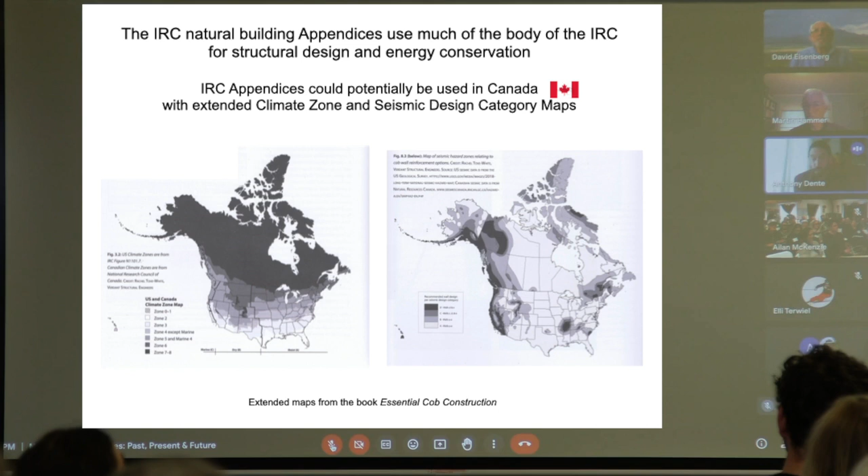We made the effort to take the code tables, charts, and images and span them between both countries, trying to make the book as applicable to both the US and Canada as possible. This book isn't just helpful for people designing cob or clay systems, you might find it useful for other factors, and that's why we believe this might be an interesting presentation for you. I'll let David take it from here.

Next slide. So, I've been dealing with building codes and natural building for, I don't know, 25 years or more maybe. And it was an interesting process. Martin, why don't you go to the next slide?

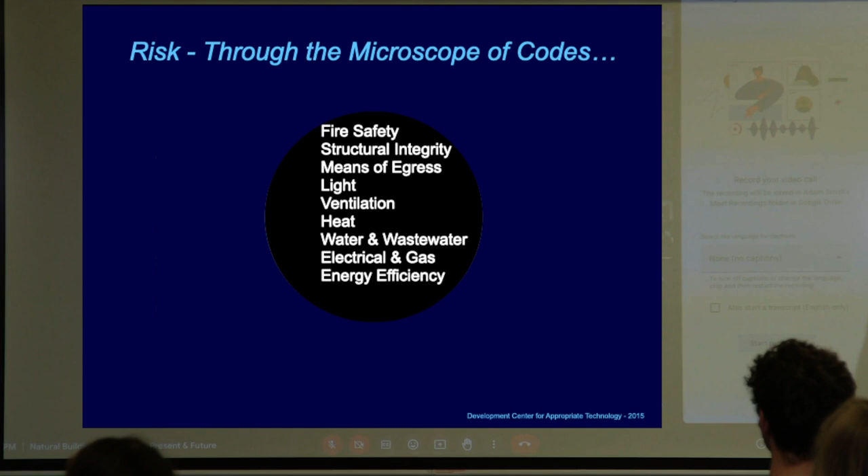A lot of it had to do with helping code officials see that they were actually focused on a set of hazards associated with the built environment that were not the full set of hazards associated with the built environment, and finding ways to talk about that with them that actually got through, expanding their frame of reference for thinking about what they were doing. It took a long time. I had this revelation, I created this set of slides about 20 years ago.

Next slide. So you see in the center there the hazards that the codes typically address, and I was pointing out that buildings are actually producing a whole other larger set of hazards that you can't see while you're looking through the microscope of building codes.

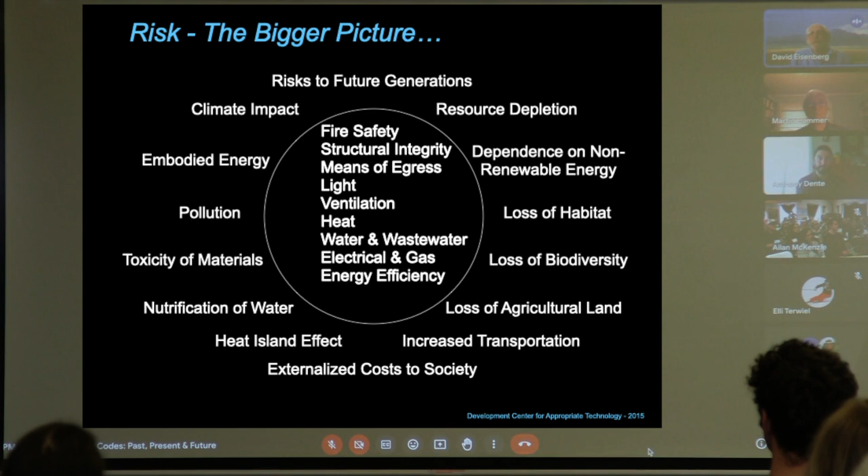Next slide. In fact, the reality is that to deal appropriately with hazards attributable to the built environment, you need to be able to see them all and work on balancing them. It's not either or, it's about recognizing how buildings are impacting all kinds of things, and how even building codes can make hazards away from the building huge, like climate change, for example.

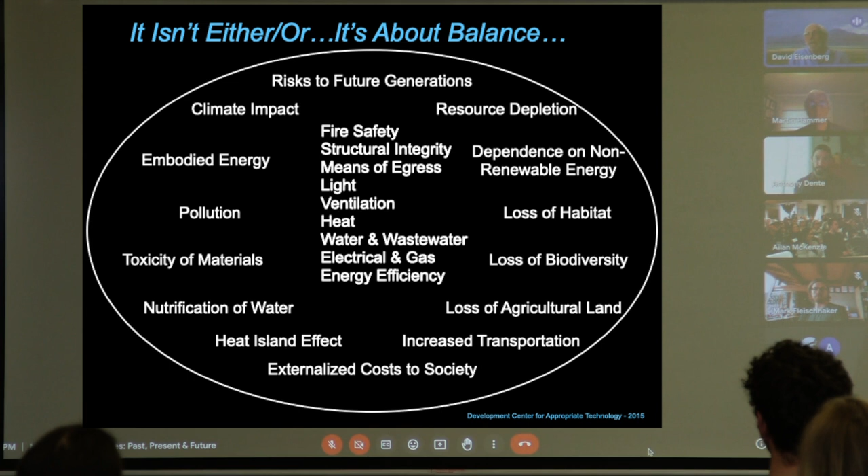Typically what's happening, whenever we would bring up issues around the environment or toxicity, basically what we would hear from code officials was it's not in their remit, it's outside of their purview. And I would point out the purpose statement of our building codes here in the US, which has a bunch of detail in it.

Do you want to jump in, Martin? Yeah, it seems David, you're back? You froze there for a moment. Am I there? You're back now. You froze as you were getting into it. Okay, I'll try not to freeze again.

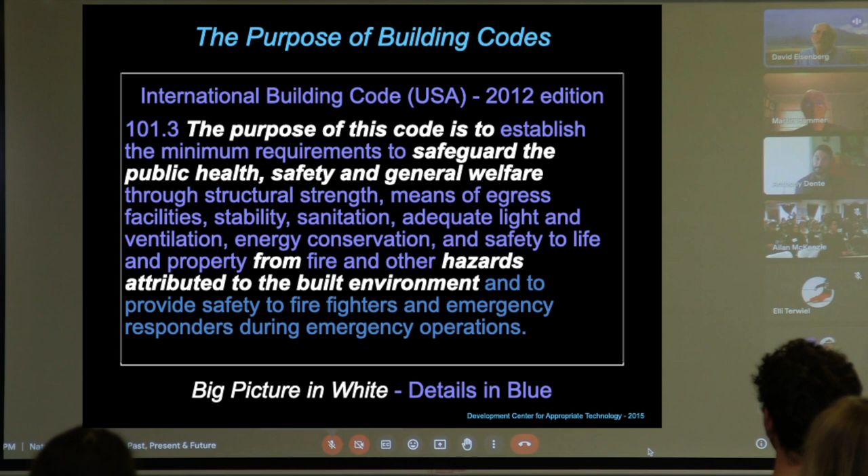So anyway, essentially the purpose is in white. And basically those things were actually part of their responsibility, even though they didn't think they were. One of the things that's happened is that they've changed the purpose statement, and one of the things they eliminated was other hazards attributed to the built environment, which was kind of a shock when Martin and I went back and were looking at this and noticed that.

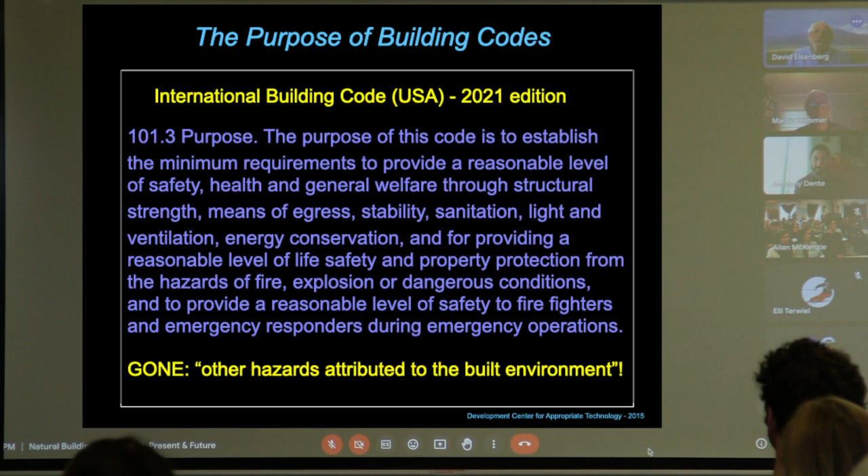But what's happened in the last few years is suddenly the International Code Council in the US, the organization that creates the US codes, they started actually recognizing a bunch of things like climate change, embodied carbon, water issues, and all kinds of things suddenly started showing up in their newsletters and in committees they were creating, and that's been really good.

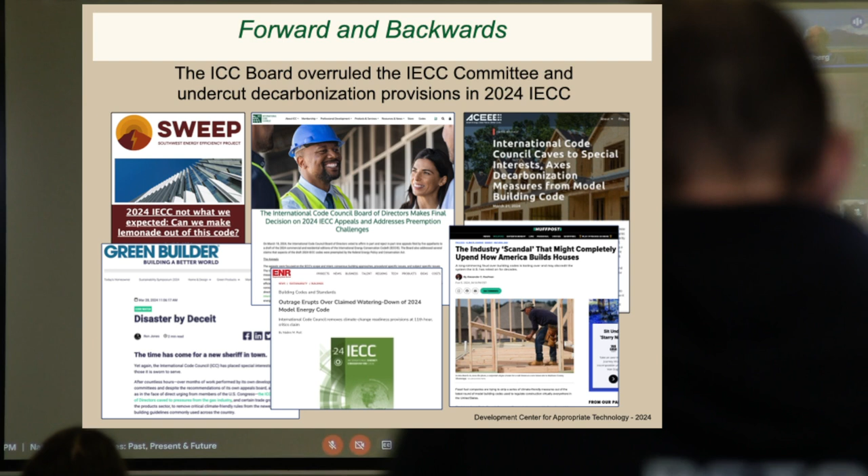And then just in the last few weeks, the ICC board basically overruled the Energy Code Committee, undermining a bunch of decarbonization provisions that have shown up. So it's a back and forth process, but things are moving forward in a way that only took about 30 years to get moving.

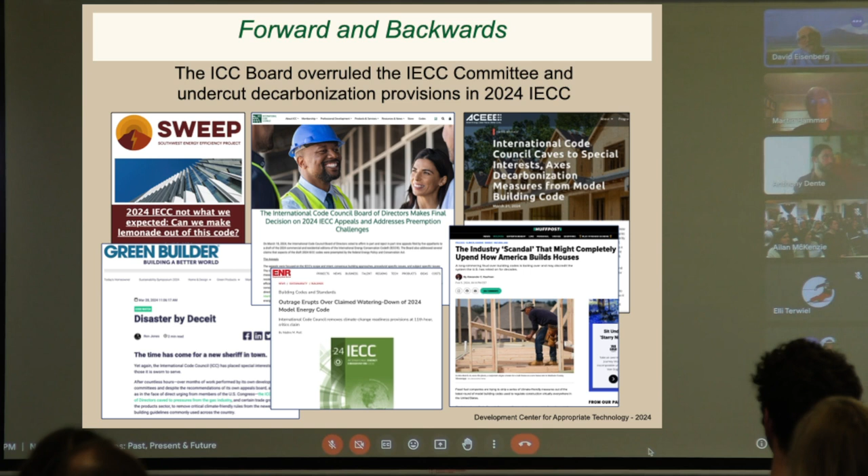Martin, I think it's... Yeah, so I'll go from here. Just a bit about the natural building codes that currently exist in the US, and we'll talk a bit later about how these might translate into Canada and elsewhere.

As David mentioned a moment ago, the International Code Council, ICC, is the nonprofit body that oversees code development for model building codes and other codes in the US. The glaring issue here is in the name of the organization, the International Code Council. Many of the model codes created under ICC's oversight are used internationally, particularly in parts of South America and the Middle East, but many countries, including Canada, don't use the ICC codes.

So some of it's aspirational, built into their name, but they are the model codes that ICC helped create. They're literally available to anyone who chooses, to any jurisdiction, national, state, provincial, county, city, that chooses to use them.

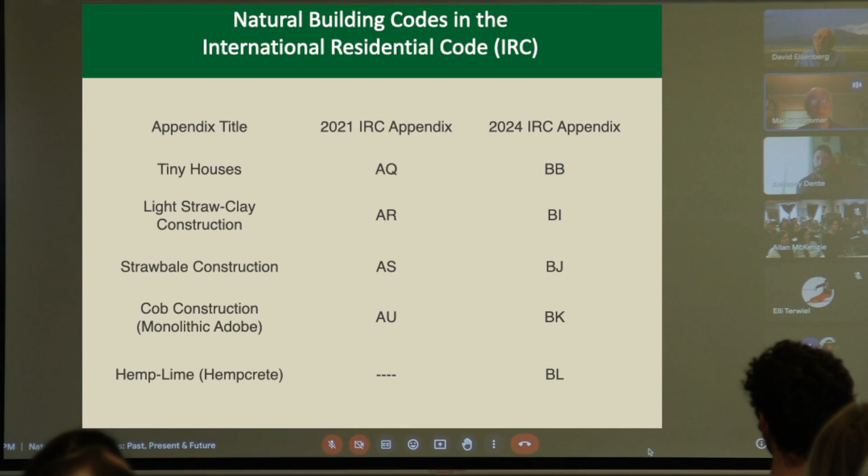This is just a quick summary of the so-called natural building codes that are in the International Residential Code, which is limited to one and two family dwellings and townhouses, so uses or occupancies outside of that are not covered, those are covered in the International Building Code. It started with the straw clay and straw bale appendices, and then followed, somewhat by accident, by tiny houses, which is not directly a natural building code certainly, but related. Then cob construction, and then most recently hemp lime.

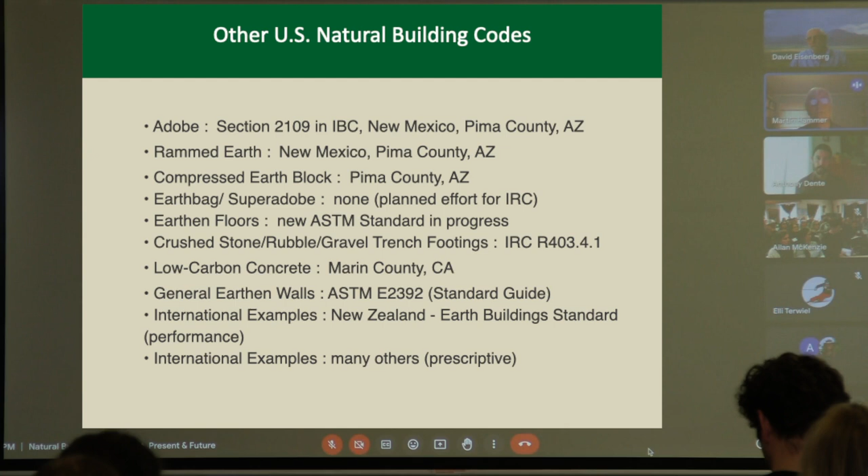And then these are other natural building codes in the U.S. that exist or are being planned. Just have a quick read of those. Also a mention of an important international example, the New Zealand earth building standards. There are others, especially for straw bale, like in France for example, but mainly this is a list of U.S. codes.

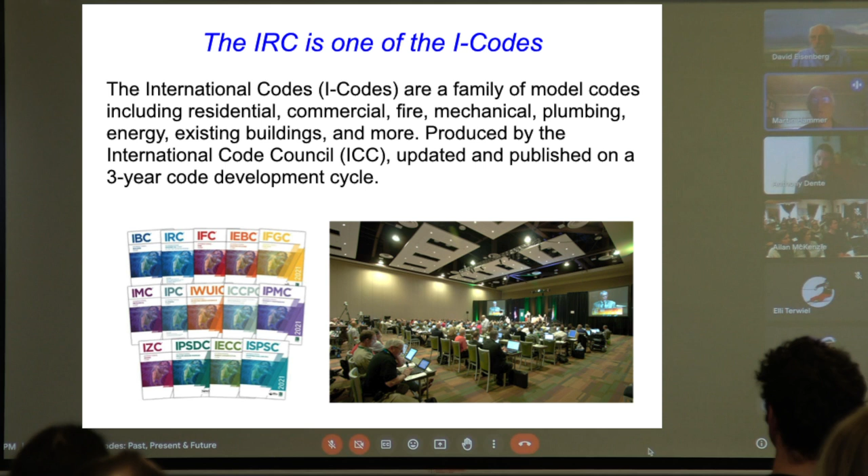Yeah, and as I mentioned, the IRC is one of the I-codes, this family of I-codes including plumbing and mechanical, and just to emphasize that these are model codes, they have no enforceable standing of their own. They must be adopted by a jurisdiction in order to be enforceable, and they are the basis of the building codes for virtually every U.S. jurisdiction, and as I mentioned, they are available for adoption and use worldwide.

So a little bit specifically what's in the codes. We'll highlight first the straw bale construction code.

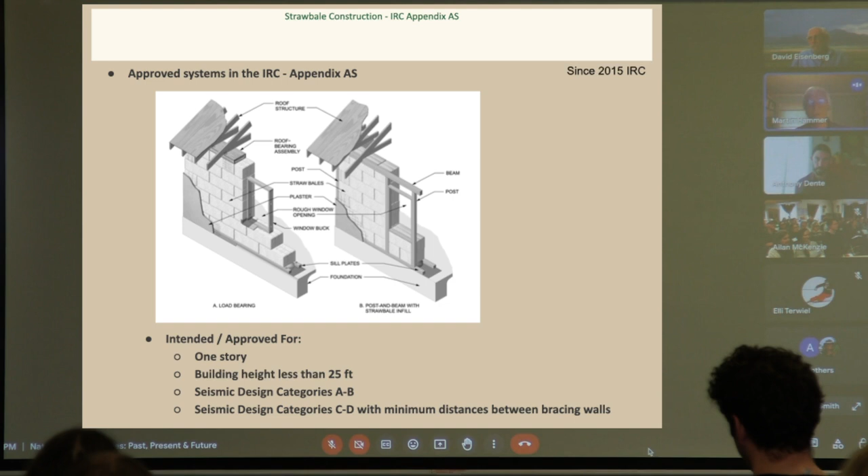All of these appendices place limits on the system. You can see at the bottom, it's approved for 1-story buildings, height less than 25 feet, and in the lower side of the design categories. Although that's with the prescriptive use of this code, they are allowed for uses that exceed 1 story or exceed 25 feet in height with an engineered design.

This is just the kind of outline of the straw bale appendix, but we use a similar outline for the other appendices like cob and straw, clay, and hemp. It was just a good way to organize all of them.

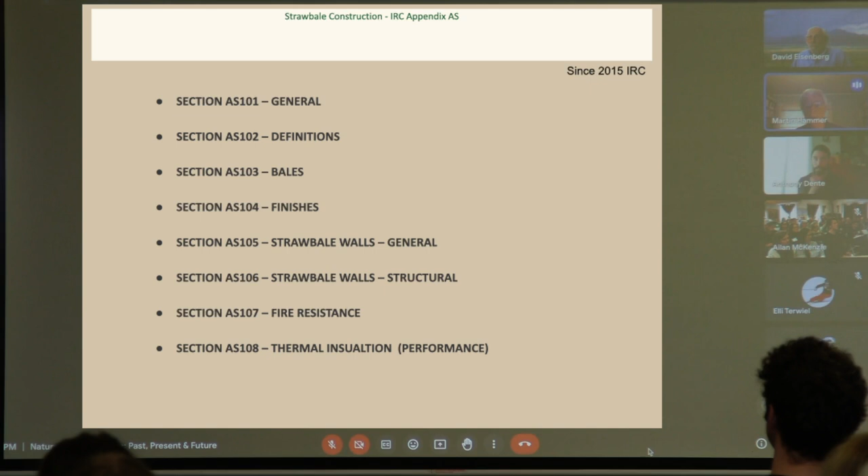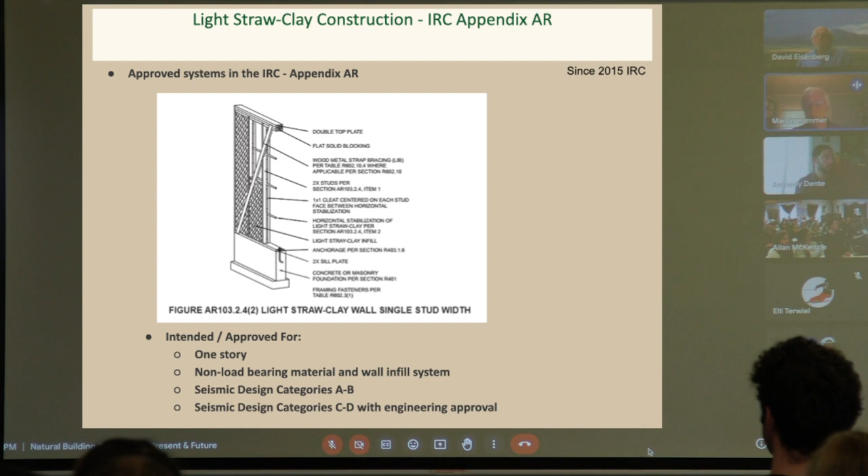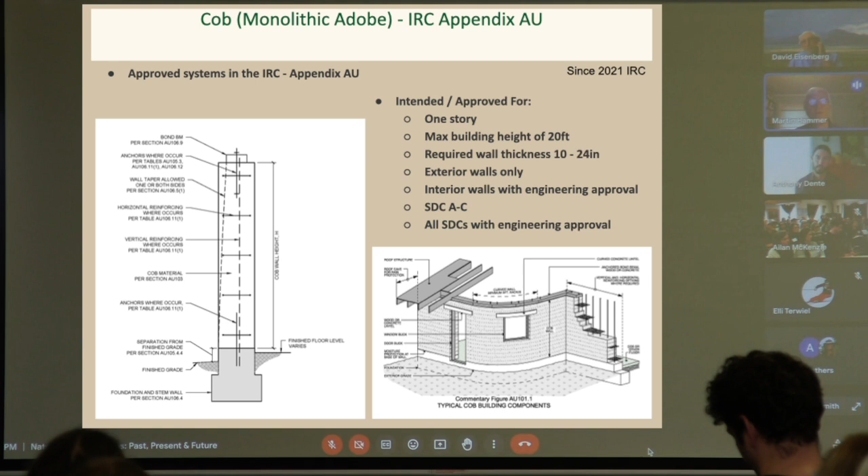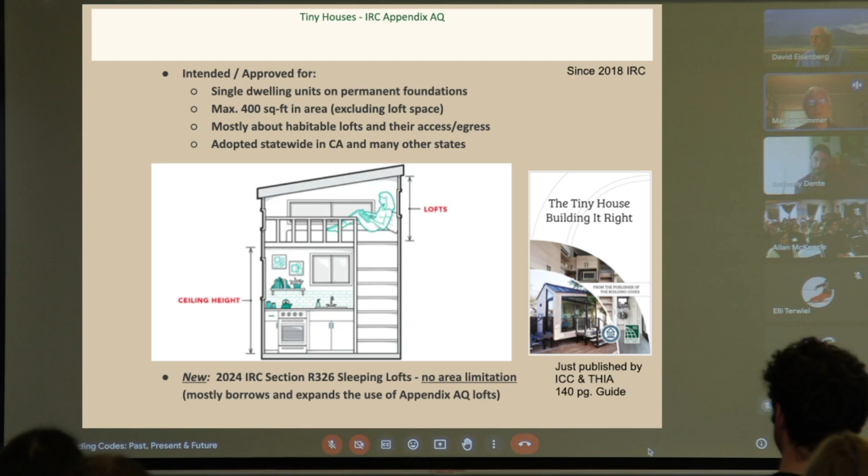And for the tiny house appendix, it was something we stumbled on. It started with me simply testifying in support of a proposal relating to this. It's remarkable how in this arena, one thing leads to another. This is a prime example, and also how relationships are built between people who work in this realm, and it takes a long time to develop those relationships and get all of these things across the finish line.

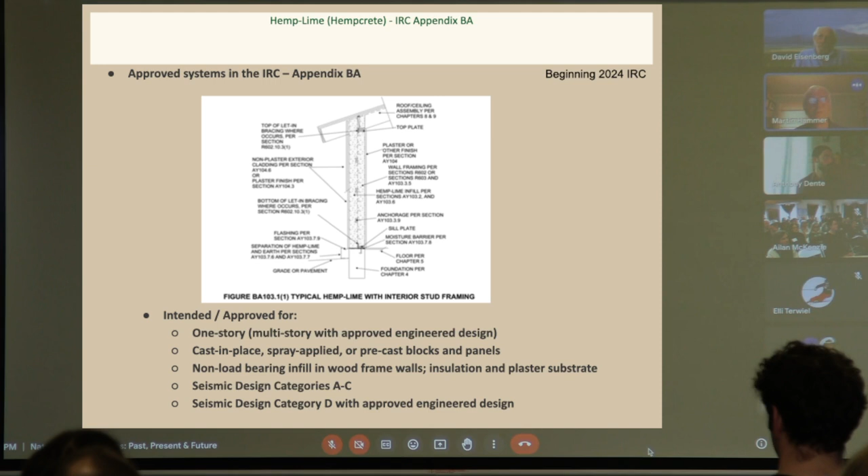Most recently, this is the hemp lime appendix in Canada. I know you guys are ahead of us in the U.S., because it was only in 2018 when hemp was approved or made legal as an agricultural crop in the U.S. And of course, France preceded Canada. That's where the hemp lime, or hempcrete, system originated.

Anthony? Yeah, thank you, Martin. And if it's not clear to anyone, or if it's helpful for the question and answer period that we plan to have at the end, Martin was the lead author on most of, or co-author on all the IRC codes in that table earlier, with David right by his side. And I've been the lead engineer on a number of these, and we've all been involved in almost all the codes mentioned that are US-based on both of those sides too.

So if you have questions about any of them - one important one is the Adobe chapter in the IBC. And if you're building with Adobe, it's got some tricky avenues. It's been around since in its current form since the 80s, and then far before that. It's slated to be removed, but for anyone familiar with our reference codes in the US, masonry is governed by the Masonry Society Code, TMS, they abbreviate that, 402. And we now have a committee in TMS 402 for contemporary Adobe Masonry section.

And I just volunteered to be the chair of the structural portion of that. And so that's underway. This code, as it currently stands, is not removed yet, but only applies structurally to seismic design category A and is quite limited. So it can be as unhelpful as it is helpful. And I can talk more about that if people have questions.

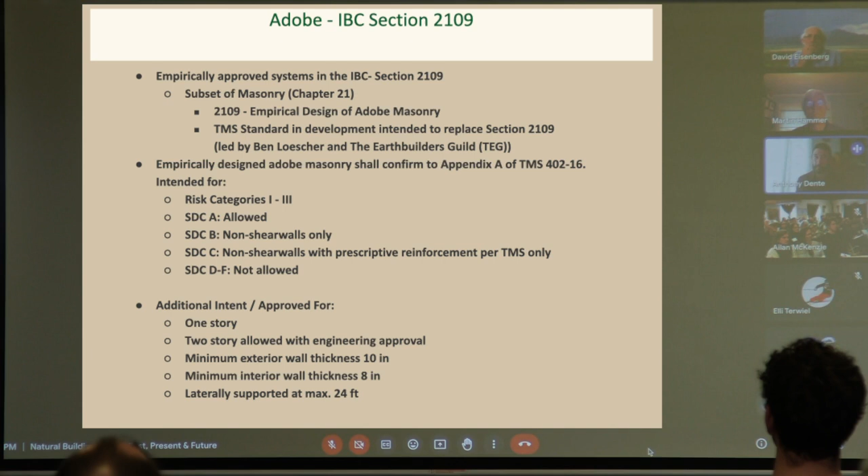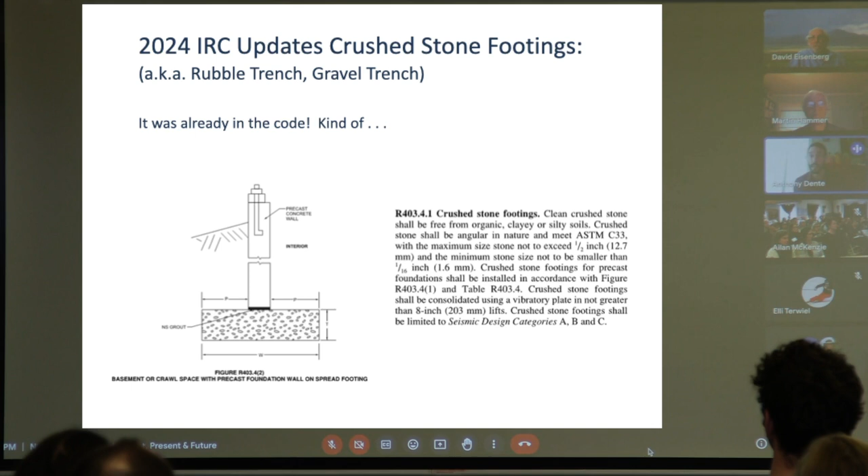And so we just simply took the language they were using for those and allowed it to be used for cast-in-place concrete footings. So you can get a good concrete cap at the base of your building. It receives your anchors, but if you've got to go deep into the soil to reach competent bearing or frost line, you don't have to do that with the high embodied carbon concrete. And we're working on expanding this even further.

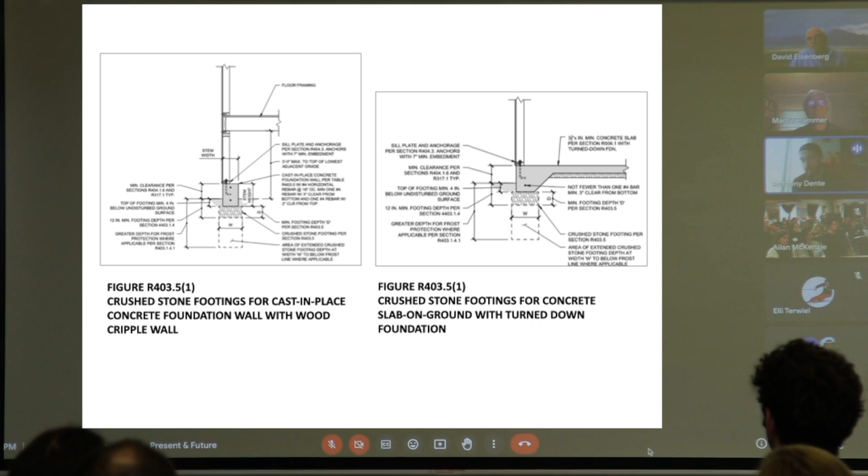And this element is one that's just in the body of the IRC. It has a section title of its own, but it's a section within a greater chapter. And so elements like this, they might not come as big news items, but they might affect more people. This is a broadly applicable technique to save carbon. Here's an example on a project that Martin and I both worked on. And it's maybe not the most photogenic system, but it can save a lot of carbon.

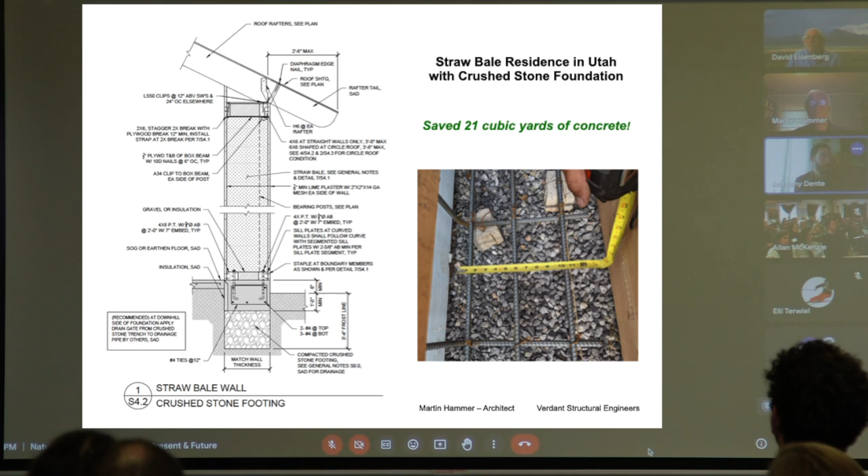No, that's me. Yes, I think that's you. Yes.

One thing that's really important to understand, at least in the U.S., is that the appendices are not automatically adopted. The local jurisdiction adopts one of these codes, like a version of the IRC, but the appendices have to be adopted separately—they don't come automatically with the base code. But even if the jurisdiction hasn't adopted an appendix, you can reference it, and it's often extremely useful for code officials because it gives them what they need. It's already vetted by the International Code Council, and it gives them what they need to plan, review, and inspect a project, with some cover for the liability of approving something outside of what they're used to doing. So if it's not adopted, you may have to do it project by project.

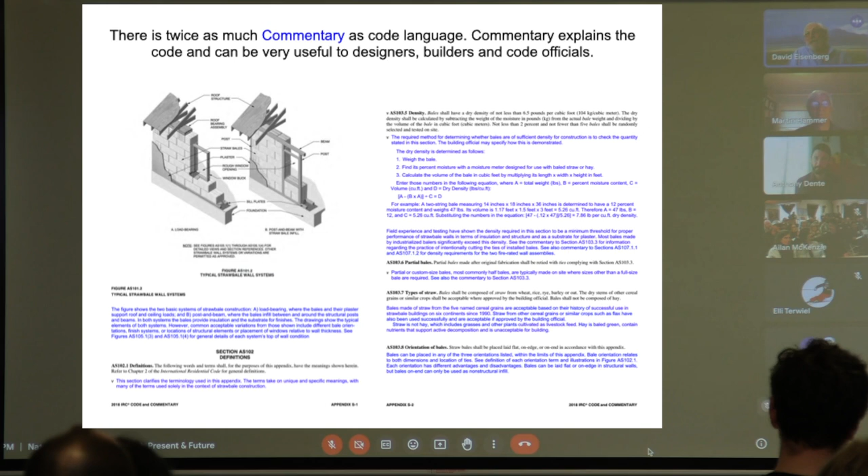Also, all the I-codes come in two versions: one just the straight code language, and you can get a code and commentary version, which includes information to help both code officials and code users know how to interpret the various provisions of the code. We've been really fortunate in building relationships over the years with ICC, which allowed us to write the code commentary for the appendices, and in fact for the Adobe section in the IBC as well, or at least edit that one significantly. This has allowed us to give code officials a lot more background and leeway in interpreting the code. You can see here there are two volumes of the IRC with commentary—it took two volumes because the IRC is a single volume code, but the commentary added a lot of additional text, basically about twice as much commentary as code language. It's been an incredibly valuable opportunity for us to shape this background information that code officials get to use.

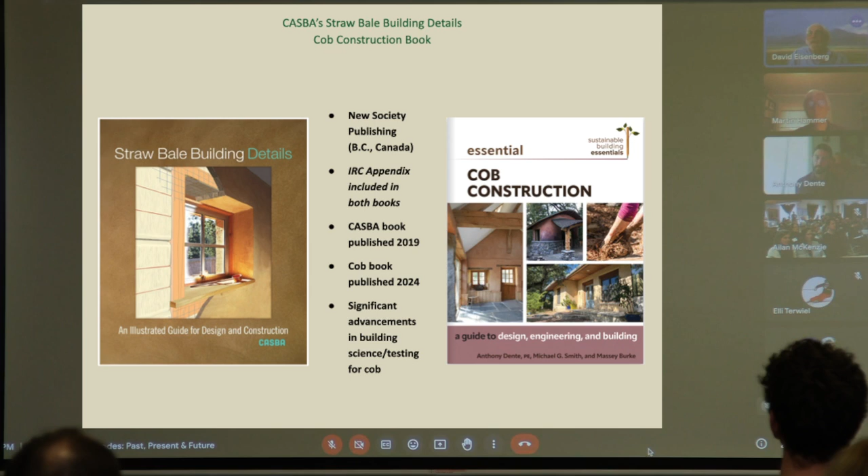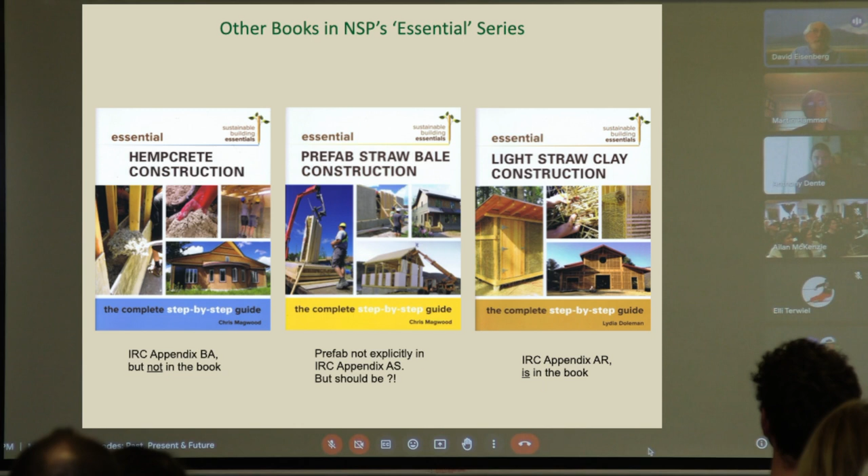Anthony mentioned this book—there's also a really good book that CASBA, the California Straw Building Association, produced a few years ago on straw bale details. There are more and more really good resources for all of these things we're working on. One thing I want to point out about the Cob book is that it has a lot of engineering information and context you won't find anyplace else. What Anthony talked about, those graphics of both seismic and climate zones combined, it's really valuable to see how these things actually relate to where you are. There's also the whole essential sustainable building series that New Society put out—there's another really good one by Jacob Racusin on building science, and others, but these are really excellent resources.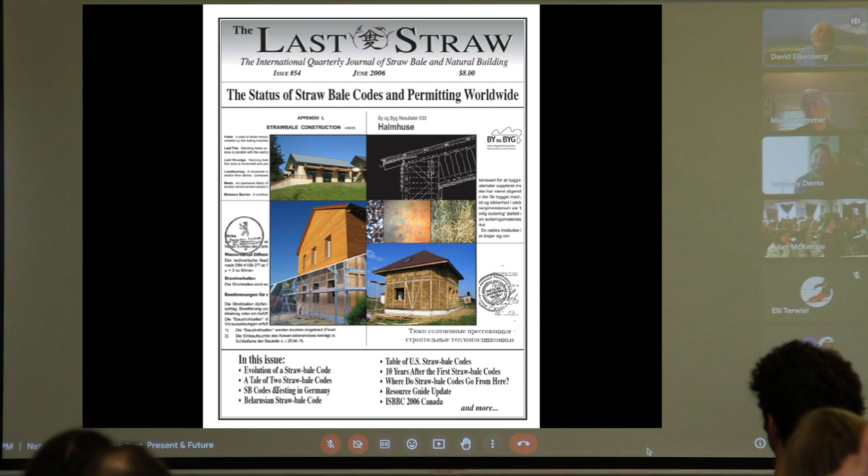Next slide. So it only took 20 years. Remember, that first issue was in '93. In 2013, in Dallas at the code hearings, we got approval for the straw bale appendix, and Light Straw Clay slipped in on straw bale's coattails. Martin, I think we tried 3 or 4 previous times to get straw bale into the code unsuccessfully.

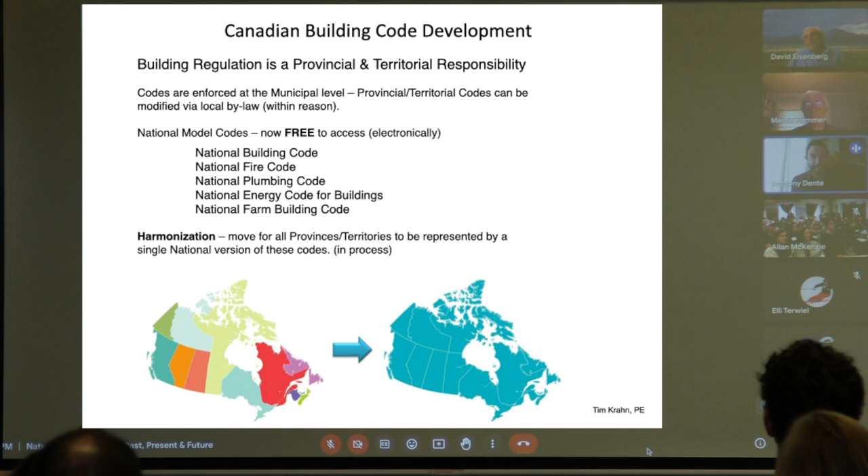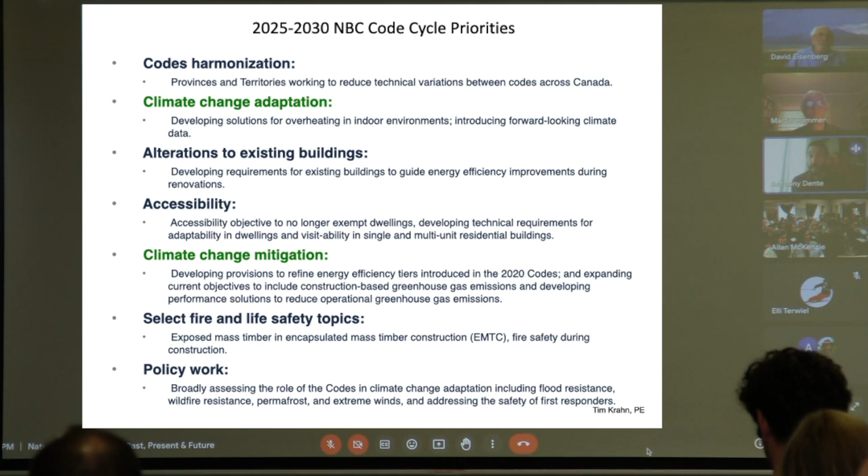As David was mentioning, we see the tides turning towards green acceptance and green focus in our codes. The same is happening in Canada, with some of these priorities highlighted right here.

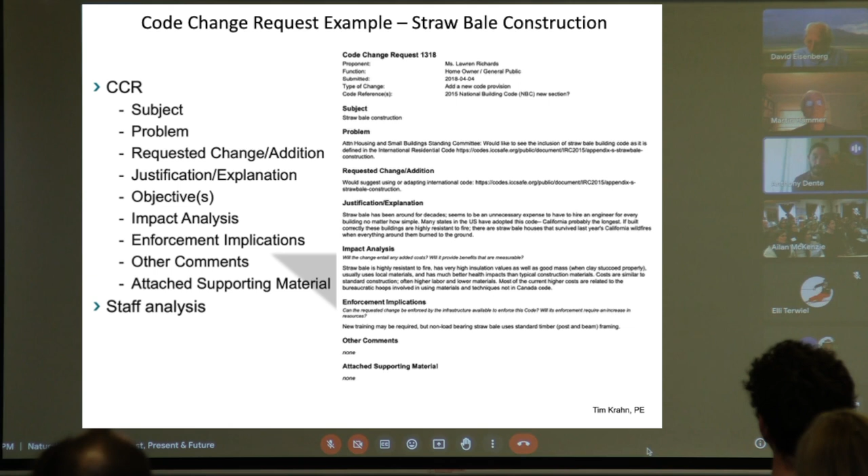If you want to change your building code, you have a process as well, and some of your countrymen have engaged in it. This is the form requirement for that proposal, and next we'll see a response for a code change that was proposed for straw bale construction. It was ultimately denied, but the comments in response relate to how we get our comments live at the hearing. It's a little bit different, but there aren't too many wildly different ways you can go about doing something like this, so it's probably a lot more similarities than differences.

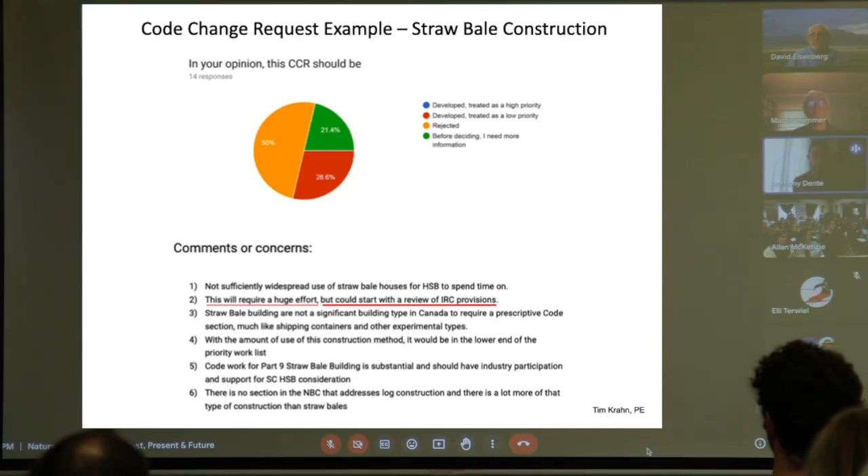Anthony spoke to this a minute ago, about participating in code development at different levels, and it is similar.

The Canadian process does seem to be very similar to what we do in the U.S., and we need the same. Actually, Anthony, David, and I are right now, with another colleague, Sasha Rabin, trying to get people all across the U.S. to help adopt the model codes, the appendices, that we've managed to get approved by ICC. If you know anyone in the States that wants to engage in that effort, it will be a big, long, and tedious effort that we officially kicked off a couple months ago.

And the codes that are coming next: I mentioned the Adobe code being worked on with TMS, which is an exciting transition because this will not be an appendix in a prescriptive code. This will be a section approved by our official TMS document in the body of the International Building Code, which is our strength-based and performance-based building code. CalEarth, with their Super Adobe system, has hired us to do case studies to see what an IRC appendix might look like for the EarthBag Super Adobe system, and expansion of all these into higher seismic categories and into the IBC. When we head into higher seismic categories into the IBC, there's a seismic barrier that requires notably more testing.

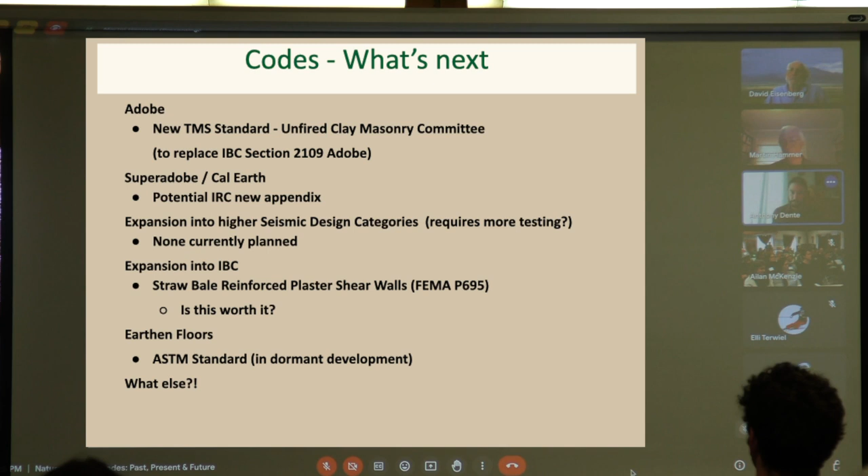David? Yeah, so one of the things that's been happening is recognition of embodied carbon. You guys have Chris Magwood, who is the absolute international rock star in this realm, just really influencing thinking about all of this in codes. We kind of stole him away to the U.S. He's now been hired by the Rocky Mountain Institute and is managing their embodied carbon program.

It's extraordinary, and one of the things they've initiated is this thing with ResNet and the HERS ratings, which are energy ratings for buildings. This is a process relating to one of the long-standing problems in the U.S.: an attitude among a lot of building officials that energy codes are not, or at least for a long time weren't considered, life safety issues, something the building department shouldn't be dealing with. One of the things that happened was that ResNet came along and really developed a system that let building departments, ICC recognized, basically let HERS ratings substitute for energy compliance in the International Energy Conservation Code.

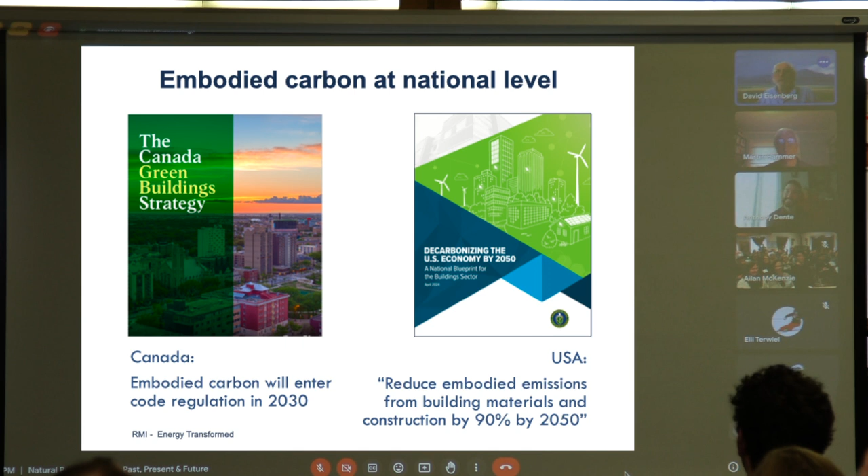But there are a bunch of resources, and I don't know whether Chris is showing up at your conference. I hope he does. And Jacob Racusin also is really involved in these things. There's some extraordinary people doing all this work, and I won't talk a lot about the details, but you have fantastic people in Canada and in your organization who are leading these things.

Hopefully you are all aware of this Beam tool that Chris and Builders for Climate Action developed. It's an extraordinarily useful tool in the design phase for you to look at materials and systems, to understand the actual quantities of materials going into your building, and to see the climate impact of decisions you're making, trying to move towards zero climate impact or beneficial climate impact buildings.

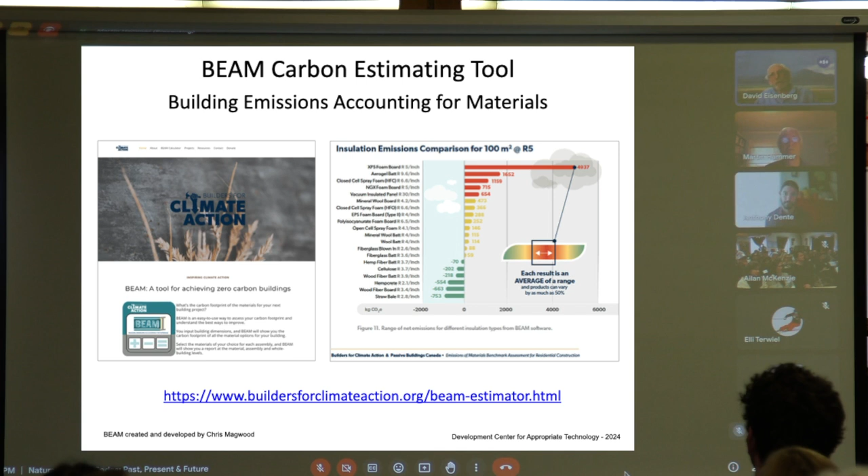And Chris and Bruce King have been working on a bunch of things. Bruce's book from a few years ago, The New Carbon Architecture, and then the book they did together. Those are excellent resources, highly recommended.

This University of Michigan academic, Mathew Lippincott, was interviewed regarding waterless toilets. So he and I connected, and then I helped him and his team put forth these two plumbing-related proposals, composting toilet systems and urine diversion systems.

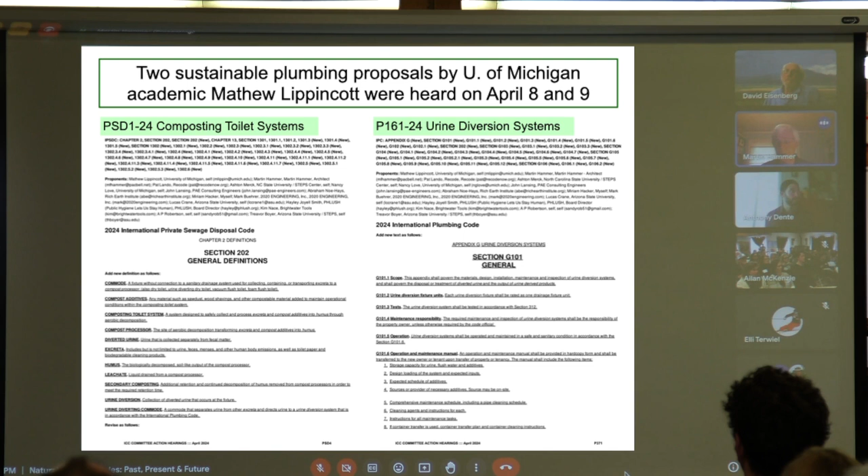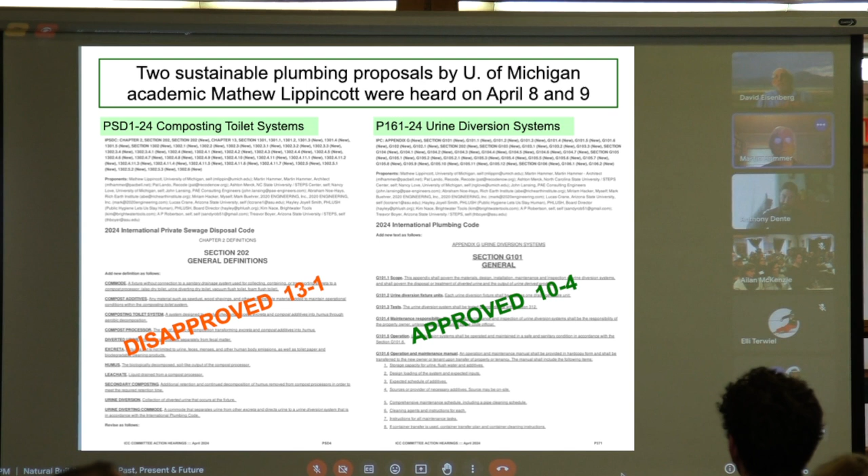And they were just heard this past week. One of them was disapproved, the composting toilet, although they were very encouraging. They had suggestions about how to improve it, and they want the proponents to come back at the next hearings. The other one was approved the first time around, so we were really happy with that.

And then Anthony's going to say just a bit about testing and codes. They go back and forth—they're just strongly tied to each other. Anthony?

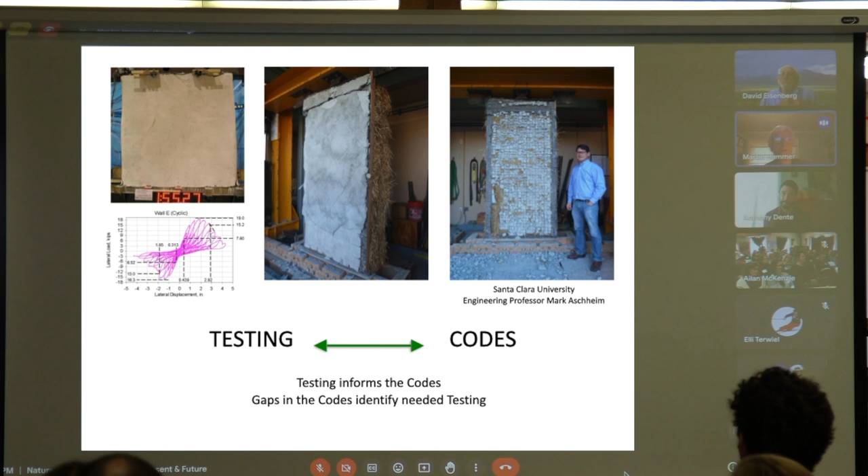Yeah, I mean, in our practice, especially for structural engineers, just trying to get more permits and more of these buildings built that we care about, you find you need more information to be going to the building department. So you engage with testing, maybe you end up with enough testing, you think you can actually propose a code, and then you have a code and some testing, you go back, get more permits. It's this circular loop or triangle, all related.

But these materials are very under-tested because there aren't that many proprietary-driven industries funding test after test at universities, and they're weird when viewed through the eyes of most labs and ASTM standards that govern the rules there. So they can be heavy and expensive and dirty, and just difficult to plug into the system that exists that we've developed to test these materials.

And if I can interject, they're also not industrialized materials or systems, so they're more variable, which means they need more testing. Right.

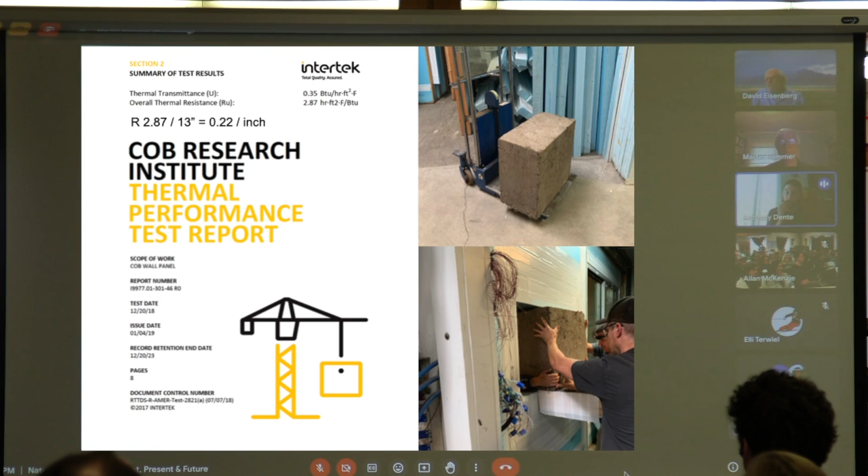And through the years, many people in your community and our community and us ourselves have been successful at kind of forging ahead and getting some of the first rounds of these tests completed. Here's an example of thermal testing on cob construction, which really opened up the door to speak more clearly about the mass wall and insulation complexities of that system, when it's appropriate and when it's not, and how it applies to our codes.

The cob code was actually turned down in its first proposal by the committee, not because of structural qualities or most of the code, but because we were crediting a 2-hour fire rating, which is the equivalent of studs with chipboard on it, for a material that we've traditionally made ovens out of.

Because we didn't have the official ASTM E119 test, we were crediting a test from New Zealand. So we went back and had this test built. These panels, 10 by 10 by 1 foot thick, nearly 6,000 pounds, need to dry for months in the lab. The complications, expense, and a lot of volunteer hours were involved. But I'll show you the end of this test in the next slide. In the video here, they heat it for 2 hours.

This is down in Bryan, Texas. And this cowboy, I think, really likes his job. It was nerve-wracking. We saw a lot of clay spraying off because the vitrified layer on the first 2 inches was getting blasted off by the hose.

But as you see from the photos around it, it was a successful test. The interior of the wall needed to be heated up to 2,000 degrees for 2 hours, while the exterior of the wall changed by less than 5 degrees, which was less than the floor slab of that building in the lab that day, just to fully document how powerful these walls are in that kind of performance.

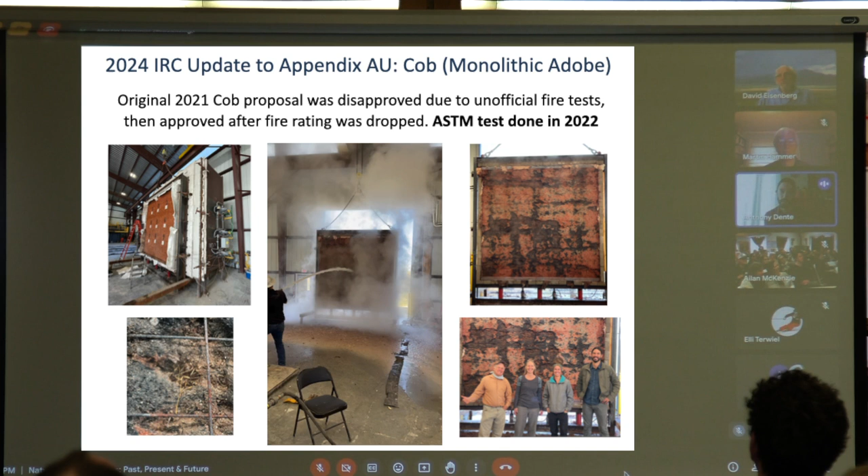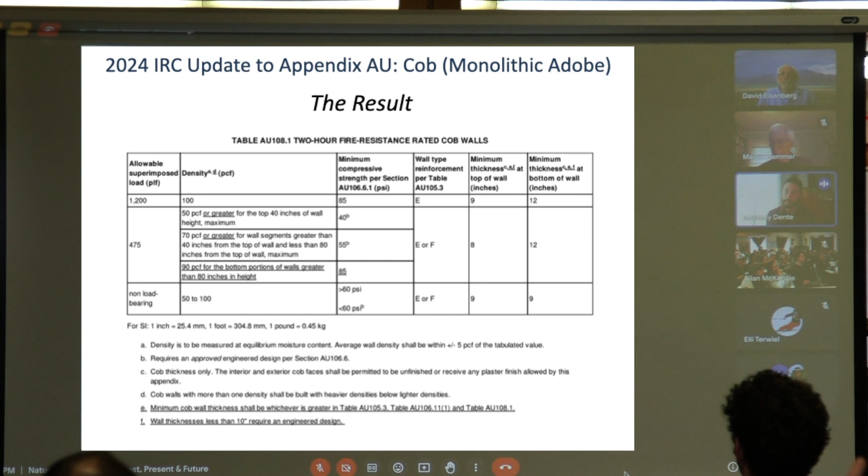This is a table on the following slide of how we translated what we found out from those 2 wall sample tests to usable information in the code, in Appendix, what was formerly Appendix AU in the International Residential Code for Cob, Monolithic Adobe. This table now exists in there, and is a direct result. You go through all the effort, you fundraise, you build it, you test it, and then finally, this is what we're going for, this slide right here.

There's lots of testing opportunities. If you're involved at a university or a lab, or just have a ton of money that you want to put towards these efforts, we are happy to share our thoughts on the lowest hanging fruit and the biggest bang for their buck tests that are next up, most understudied, and will be most valuable in the code realm, permitting realm, across likely both of our countries. So don't hesitate to be in touch if you're interested in these subjects.